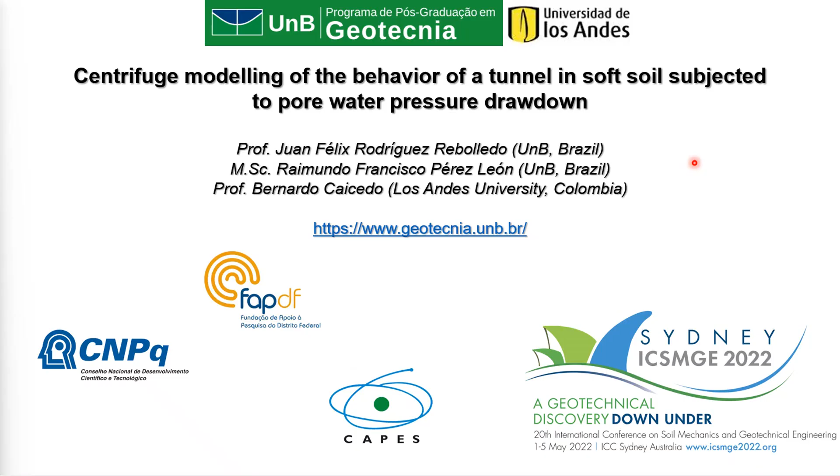I want to talk to you about centrifuge modeling of the behavior of a tunnel in soft soil subjected to pore water pressure drawdown. This project was done with the collaboration of Professor Bernardo Caicedo from the University of Los Andes in Bogota, Colombia, and it's part of the PhD project of our student Raimundo Francisco Perez León.

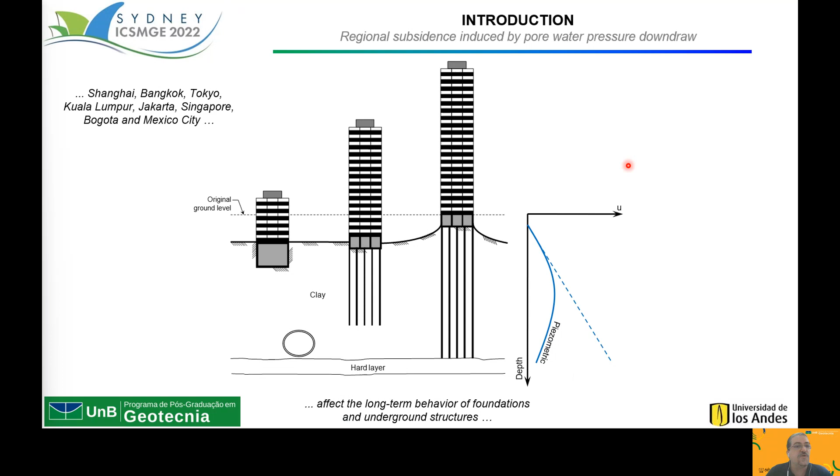Regional subsidence induced by pore water pressure drawdown affects the long-term behavior of foundations and underground structures. This phenomenon occurs in big cities such as Bangkok, Tokyo, Jakarta, Singapore, Bogota, and Mexico City. Some numerical modeling done by Rodriguez Rebolledo et al. shows that total stress is changed around the tunnel lining during the pore water pressure drawdown.

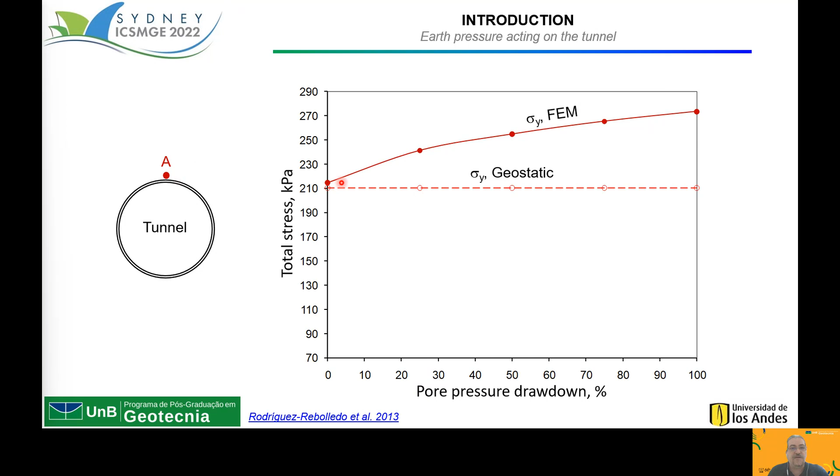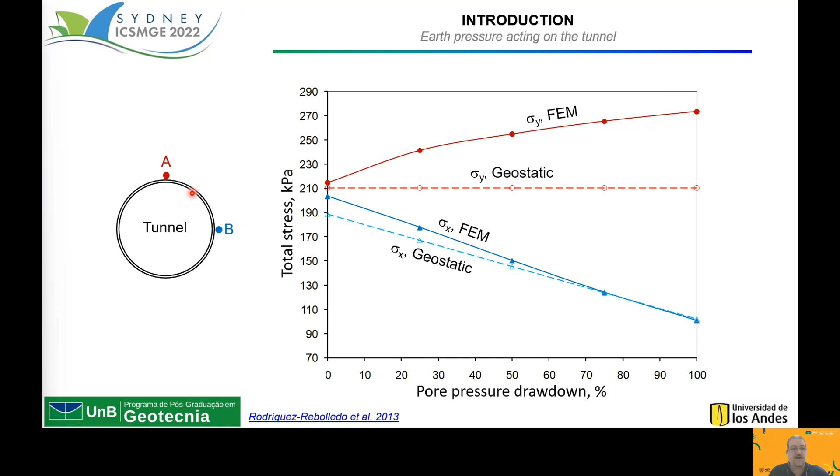We can see here that vertical total stress in point A increased during pore water pressure drawdown. And we can see in point B that the total horizontal stress decreases during pore pressure drawdown. This phenomenon is critical for the structural behavior of the liners.

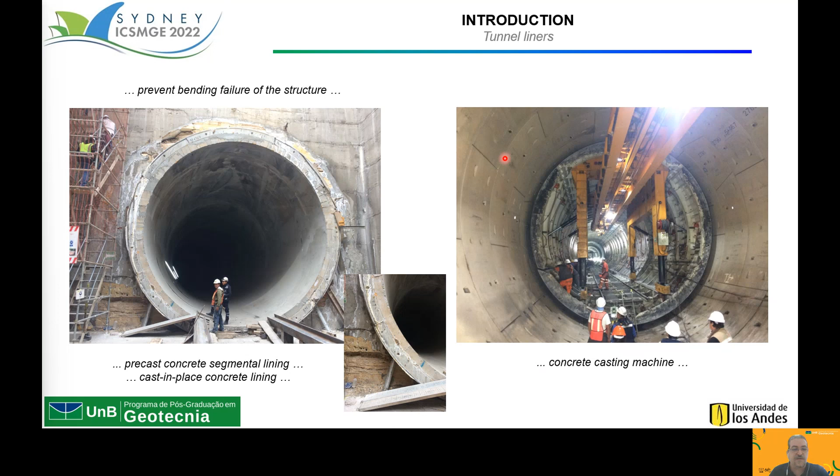To prevent bending failure of the structure in Mexico City, two liners are considered: one, a precast concrete segmental liner, as shown here in the photograph, and another, a cast-in-place concrete liner. This is the concrete casting machine. In this condition, the cost of the project is bigger than other projects in other conditions.

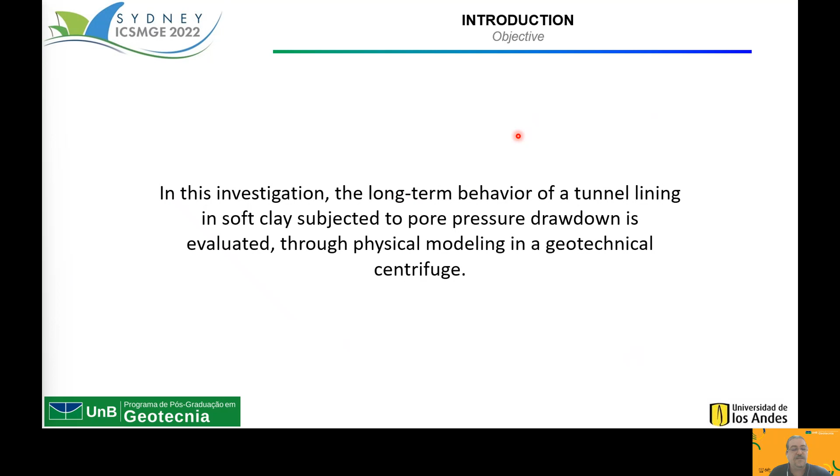In this investigation, the long-term behavior of the tunnel lining in soft clay subjected to pore pressure drawdown is evaluated through physical modeling in a geotechnical centrifuge. The geotechnical centrifuge we use is located at the University of Los Andes in Bogota, Colombia, and it's part of the experimental group of Professor Bernardo Caicedo.

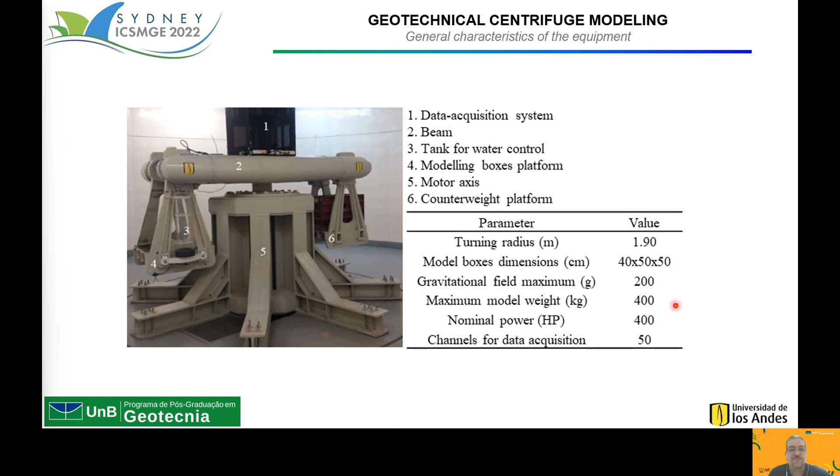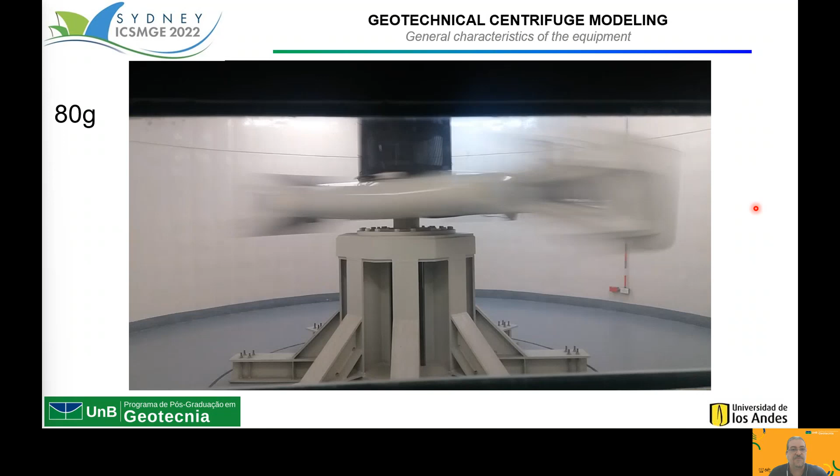The centrifuge is a beam centrifuge with a turning radius of about 1.9 meters, a maximum gravitational field of 200 Gs and a maximum model weight of 400 kilograms. Here you can see the centrifuge at an acceleration of 5 Gs. And here you can see it at 80 Gs of acceleration. Those 80 Gs were the acceleration we used for this modeling.

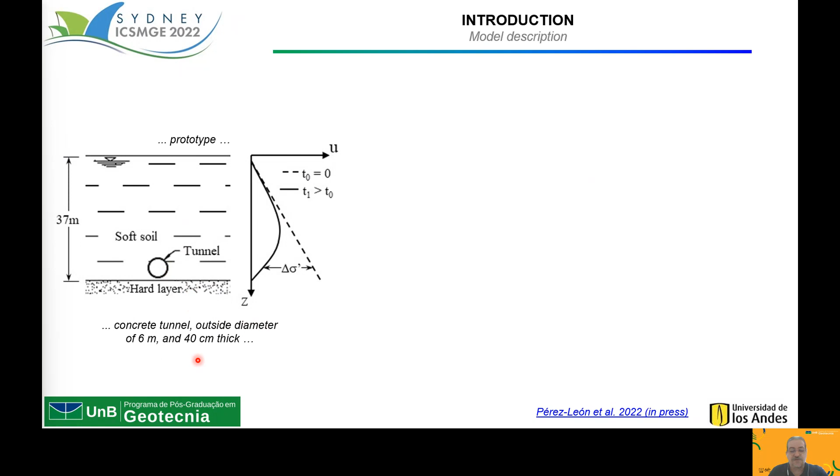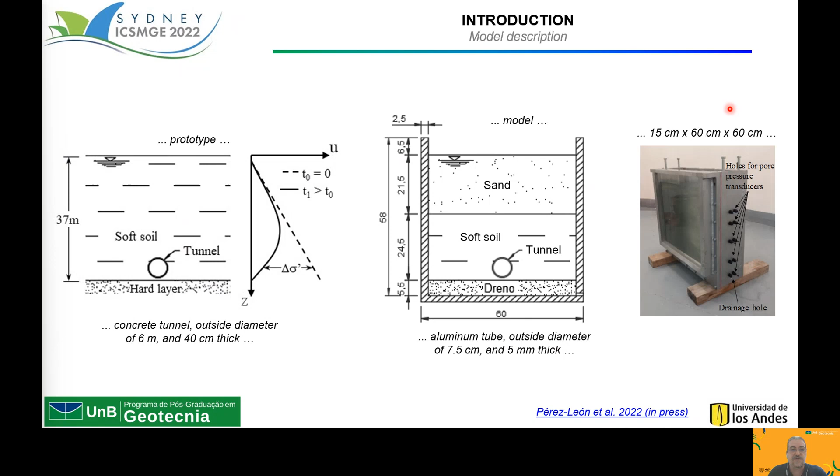The subsoil was a mixture of kaolin with a diatomaceous soil from Bogota. The proportion was 50% kaolin, 50% diatomaceous soil. The classification of this soil is a high plasticity clay or silt because it's very near to the A-line. And why did we consider this proportion of kaolin with diatomaceous soil? Because with this mixture, we can better simulate the properties of the subsoil.

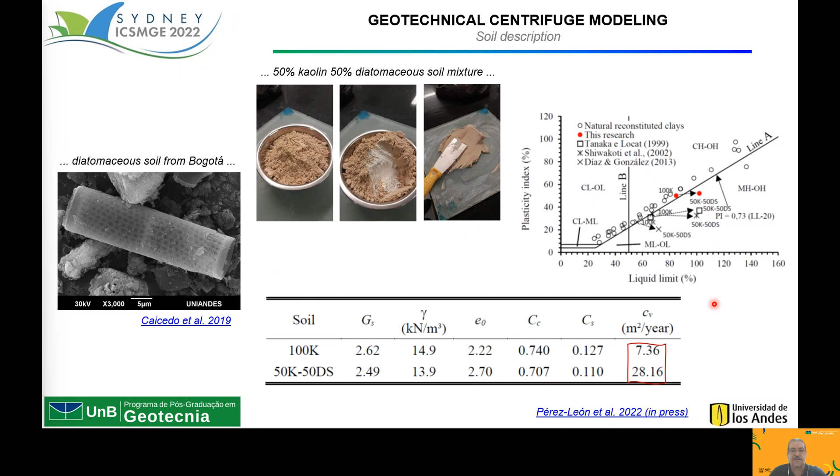We can see here that the density of the soil decreases, that the void ratio of the soil increases, and one of the best advantages of this soil is that the CV value increases a lot. This allowed us to do the experiment in a shorter period of time, as we are going to demonstrate at the end of this presentation.

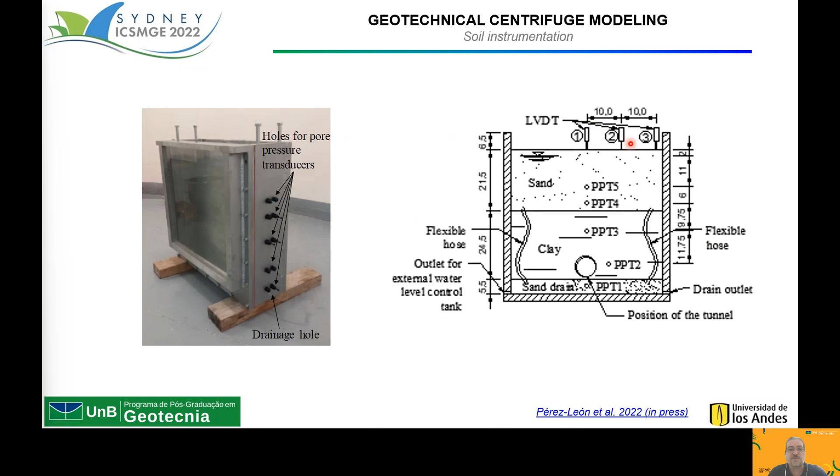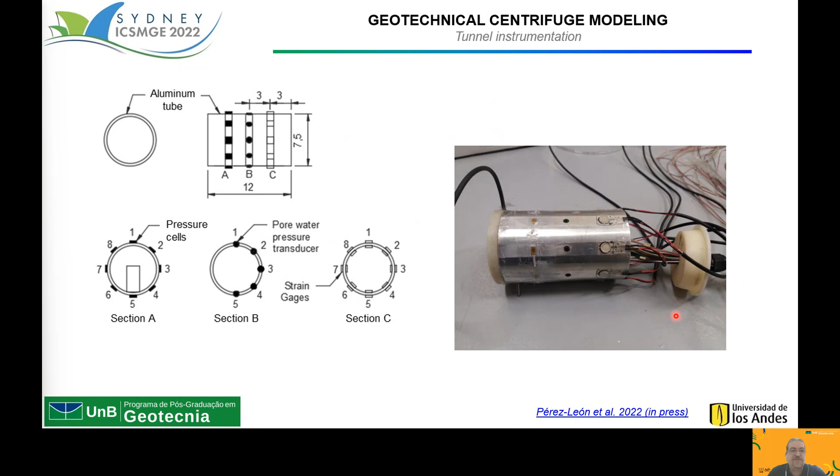This is the soil instrumentation. We put some pore pressure transducers along the depth of the model, and we also used some LVDT transducers to measure the settlement during the pore pressure drawdown. This is the instrumentation around the tunnel. We put around the perimeter 8 pressure cells, 5 pore water pressure transducers and also 8 strain gauges. Here you can see the final view of the instrumentation of the tunnel tube before we placed it in the model box.

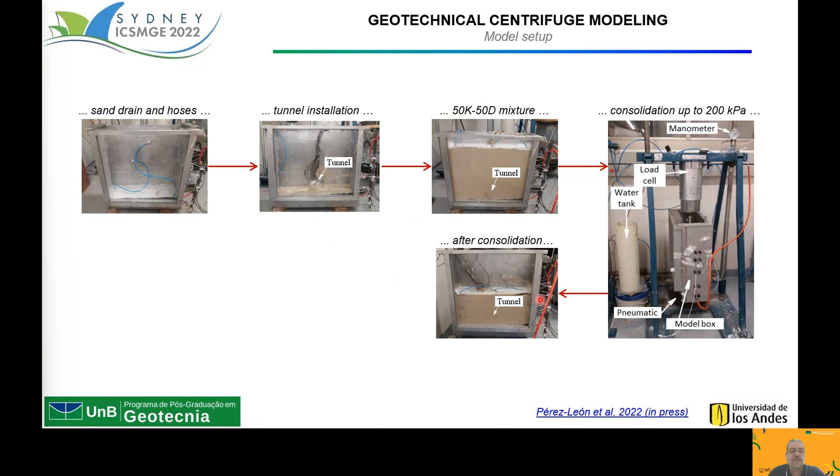This is the model setup. First, we place the first layer, a sand drain with some hoses. The hoses also help to accelerate the consolidation in the model during the experiment. This is the tunnel installation and the instrumentation. Then we put the soil mixture, and then we consolidate the soil mixture up to 200 kilopascals. Here is the soil mixture after consolidation. And at the end, we put the sand layer.

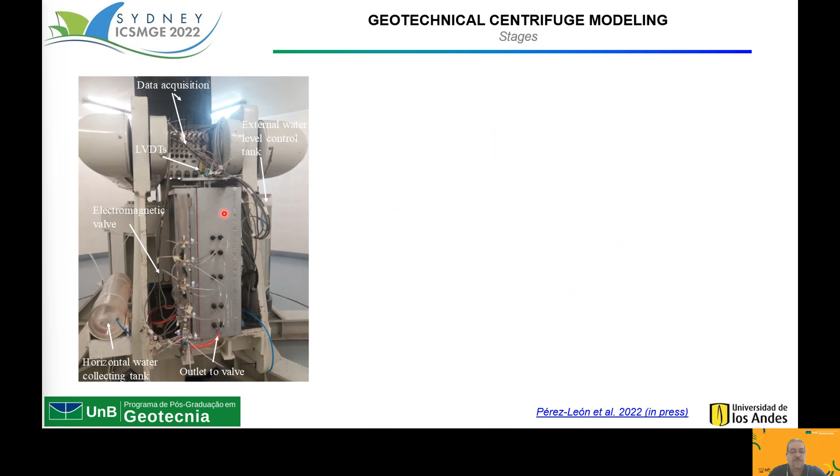This is the model in the machine. Here you can see we have 2 tanks: this horizontal tank and this vertical tank. The horizontal tank is a collecting tank. This tank allows us to simulate the pore water pressure drawdown, and the vertical tank allows us to maintain the hydrostatic condition at the first phase of the experiment.

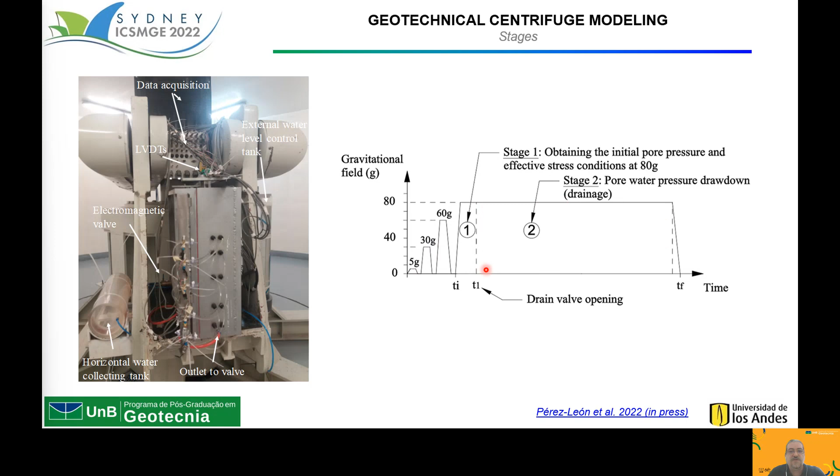These are the stages of the experiment. Here we have the initial phase of the experiment. We increase the acceleration of the centrifuge in these stages to allow the calibration of the instrumentation. Then we have the first stage at the acceleration of 80 Gs to obtain the initial pore pressure and the effective stresses, and the second stage where the pore water pressure drawdown was done.

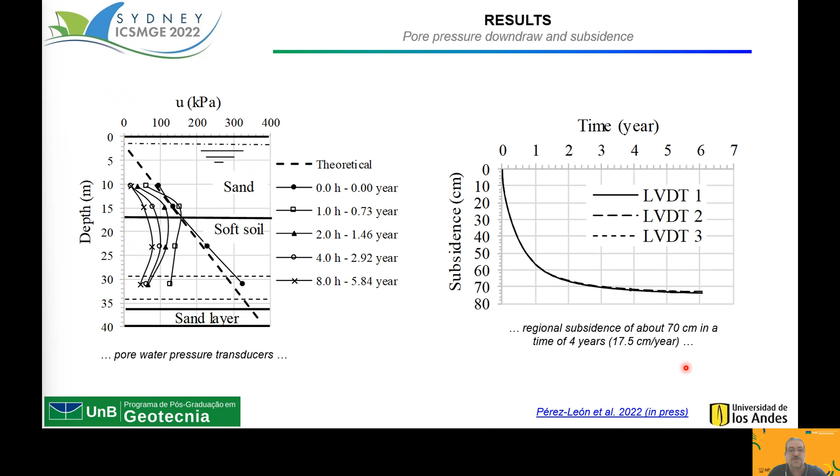This is the subsidence measured with the LVDT transducers. We can see that it was possible to simulate a regional subsidence of about 70 centimeters in a time of 4 years. This is a velocity of 17.5 centimeters per year, very similar to measurements of the regional subsidence done in Mexico City.